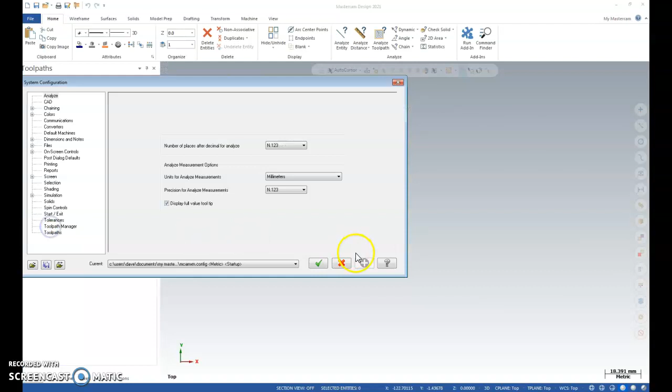All right, first things first. I'm gonna remind you that we're in metric right now. We don't want to be, so I'm gonna go to File and Configuration, slide down here, go to inches, and then change it to imperial. There I am. Perfect. And then I'm going to go load my file in.

So I'm going to open my file. I'm going to go to my computer. It's in this folder. Oh, look, it's not there. That's because I have to make sure I turn on AutoCAD files. And there it is. Open that up. There's my guy. It's got lots of different layers in it.

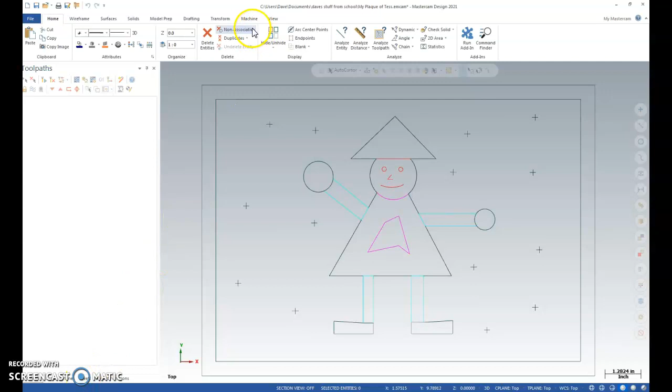First things first though, layers are down here. It's called levels in Mastercam. Going to go here to machine and load up the default machine. And open up my dialog box, change my tool settings. There we go. And select, drop down bar, go to library, slide down to the bottom, and there's wood. Checkbox.

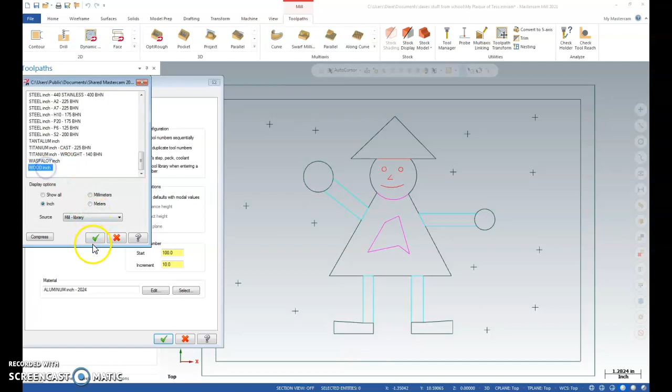I'm going to go to stock setup, going to display, do the corner, going to go 10 for the height. That's this way, Y, and 14. That's X, that's this way. And 1. Beautiful. All good. Checkbox. There's my red border around. I know I'm looking good.

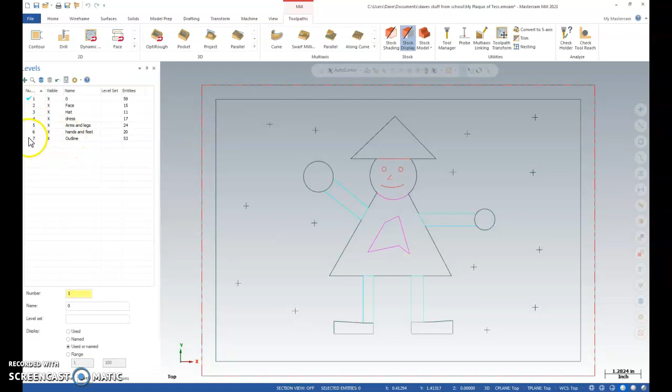Now what I want to do is turn off all the layers except for the one that is the outline. I'm going to start there, and you should always start there too. So here's my way to turn layers on and off. Level. I'm going to checkbox the actual layer I want to work on, which is the outline. So there's the checkbox, and then I'm going to turn all the other layers off. And look, I just end up with my layer guy.

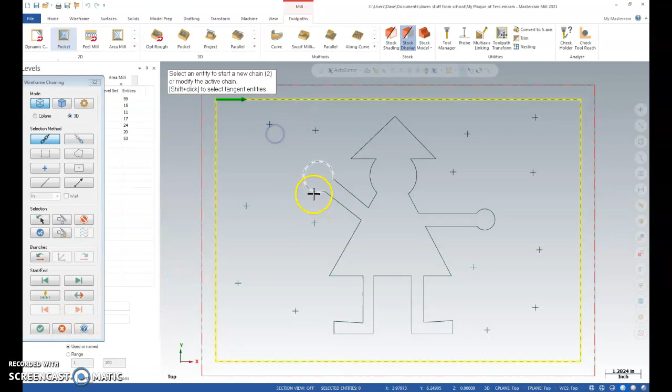And I'm going to do the outline, so that's going to be a pocket. So I'm going to scoop out all the wood between here and here. So there I go, and I'm going to select the border and the object. That's going to remove all the material in here. I know I did a good job because I got 2 green arrows.

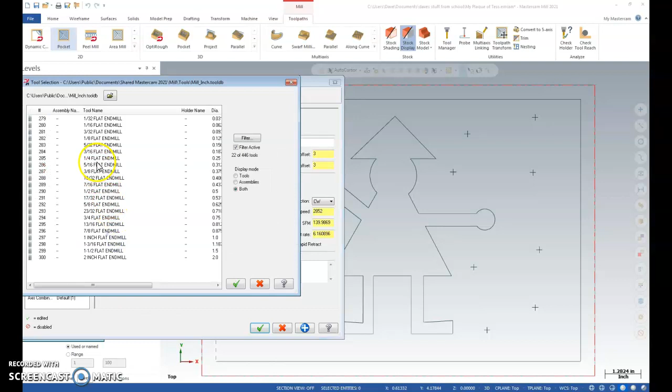So slide over here to checkbox and pick the tool. I got to select it from the library. So tool number 1 is 1/2 inch. Checkbox. Select tool. Tool number 2 is 1/4 inch. Checkbox, and these are end mills, remember. 1/16. Checkbox, and select library. Number 4 is 1/8. Beautiful. Checkbox. All right, I'm going to select that guy.

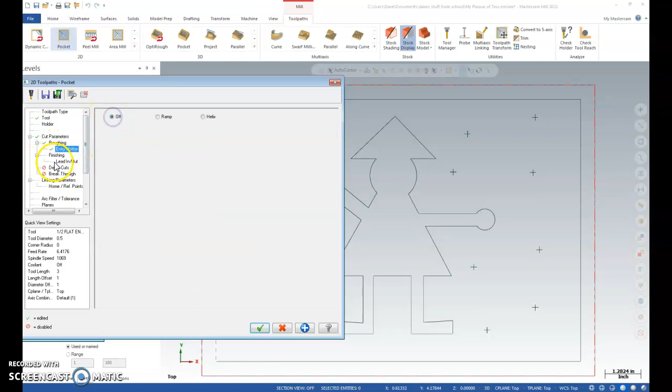I'm going to go to cut parameters. Remember, I have to get rid of this, so that's 0, 0. Roughing, I'm going to make it a zigzag pattern. Entry motion, I turn off. Finishing, I leave on. Lead in, lead out, I turn off. I put in my first cut depth, which is minus 0.25.

And checkbox. Now I could verify this and make sure it all works, but last time I did that on my computer, it crashed. So I'm probably going to wait till near the end, because really the lesson's just about turning layers on and off. But I would check virtually every single time.

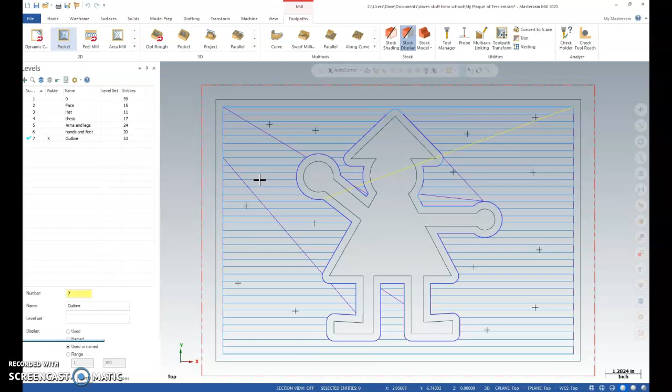So I'm going to come back here to Toolpath, and I would normally go Select All, Regen Path, and then I would go over here to Verify. But I'm not going to do it right now because I'm a little nervous since it's already crashed on me once today on my old computer.

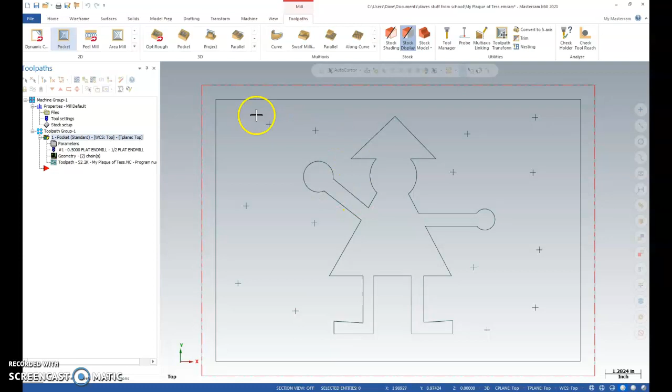The next thing I'm going to do is get rid of all these lines, right? So I'm going to turn them off. And I want to go around this and make it nicer. So this is going to sound familiar. So I'm going to go to Contour.

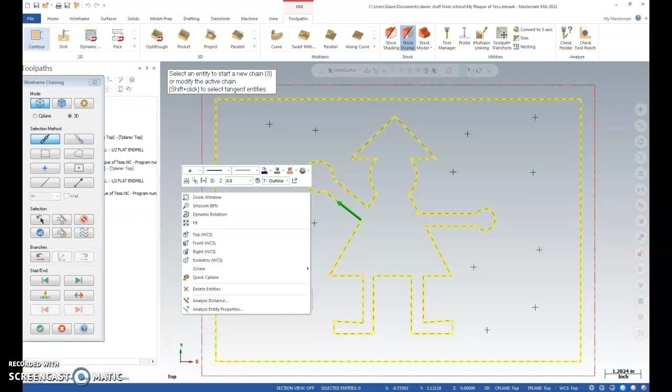And I'm going to select the inside of the border, counterclockwise green arrow. I'm going to select the outside of the outline, and that is going to be the tool on the outside. And then I'm going to go to checkbox.

And then I'm going to slide over here to tool. I'm going to go 1/4 inch. I'm going to remember to make the speed 59. I hope I changed the other one. I think I didn't, so I may have to go and modify that, 10 and 60. 59 because it's tool 2. Tool 1 is going to go at 60, and they all have different speeds.

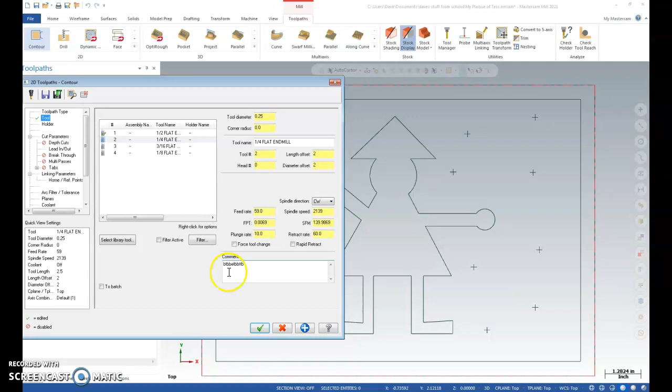Lead in, lead out, we turn off for our work in wood and acrylic. Linking parameters is where I'm going to put the depth in. If you recall, the pocket was down 1/4 inch, so this one's going to be down 0.25. All of this would come from my sketches and the work I had done earlier.

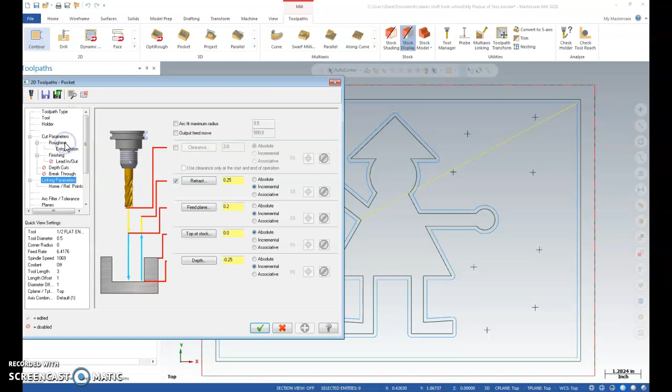Checkbox. Now, remember, I messed up here - I didn't get the speed right on this one, so I'm going to select that, go back to Tool, and fix the speed up. Tool 1 runs at 60, those are inches per minute, and then 10, and then 60.

Great, blah blah blah about what I did there. Checkbox. All right, I'm looking good now. So I have that, and I have around here so I get a little more detail. But I could go for a little bit more detail, so if I select this one only, I can right-click, copy it, then right-click and paste. So this is the exact same toolpath as this one.

Now I want to change this to half the diameter again, which is an 8th-inch tool. I'm going to go to Parameters, change that tool to 1/8 inch, right here. The 3/16 is really only used to pocket small spaces that the 1/4 inch or 1/2 inch won't fit in - it's never used for contouring. So anyway, 1/8 inch, you can count down, that would be 57, and 10 and 60 stay the same, and blah blah blah because it copied all the same stuff.

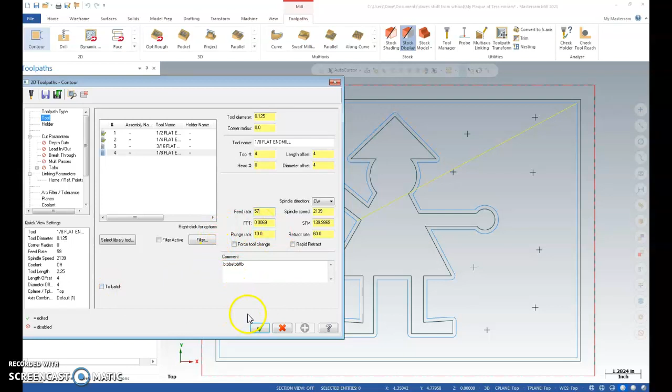And I would go, same depth will be here, see, -1/4, so checkbox. And now we're all set. Do you notice that the red X is there? That's because I changed something, the tool, so I have to select all and regenerate the path. If you see red X's in here, you always need to select all and regen the path.

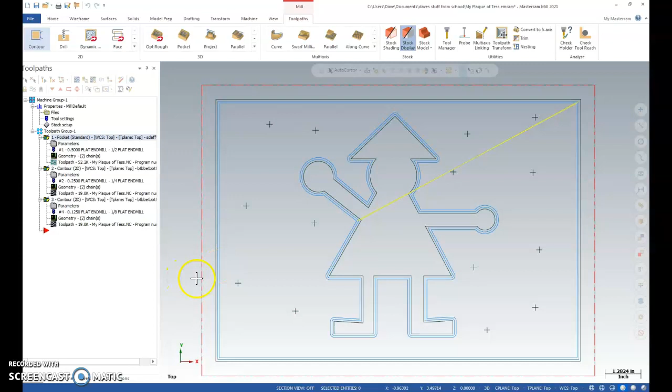Okay, I'm looking good, I have the outline, it's completed, I don't need to do any more, so I'm finished with that. I'm going to turn that layer off and work on a different layer. I'm going to get rid of the tool paths first by hitting the wavy thing, so then it puts them all on, turns them all off.

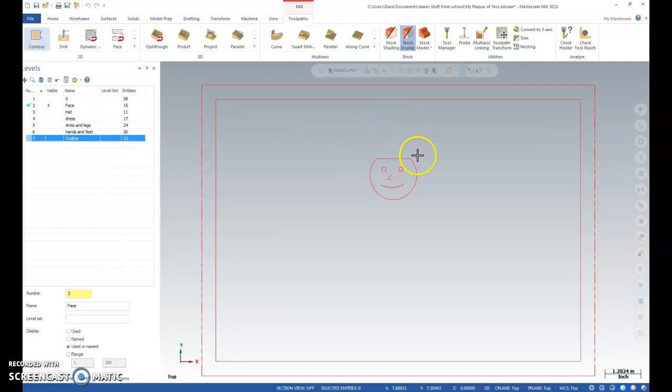Okay, I'm going to come back to levels and work with the face, checking that and turning all the others off. So there's the face, I am only going to pocket the face. This is how we do things - we work our way from top down. The hat I'm just going to leave, and it will eventually be there on the surface, as will the border, and then I'm going down 0.05, just like my sketch for the face.

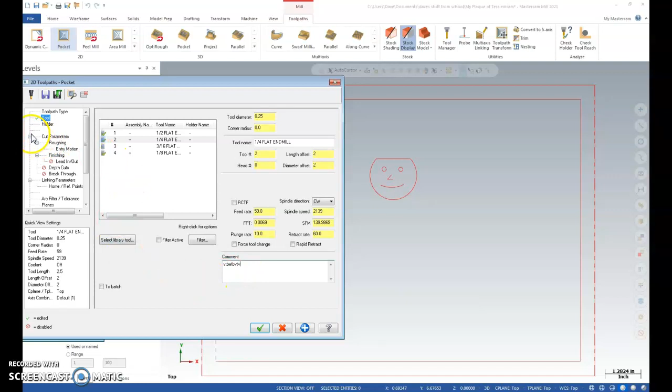So here I go, I'm going to do a pocket, and click it - doesn't matter what way the arrow goes in a pocket. Checkbox, tool, use 1/4 inch, 59, and 10, and 60. Blah blah blah blah blah about the depth and the tool and everything. All of this will stay the same, and then I just have to put in here the new depth, and I am only going down 0.05 according to my sketch.

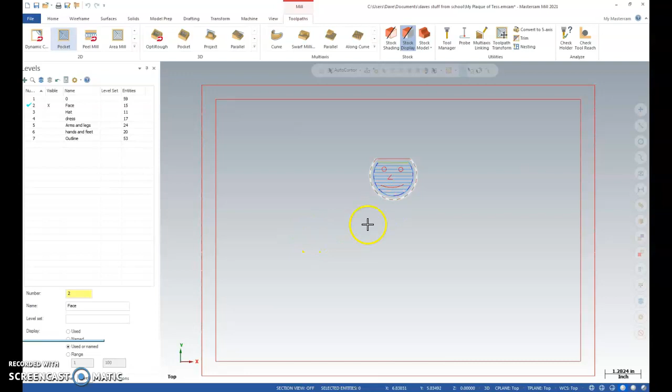Checkbox. Now I want to do the engraving that's in there too, so I'm going to do that probably right now since it's already there. So this toolpath is there, I'm going to go back to my toolpaths - so there's my toolpaths, that is the pocket, that is the face. I am going to now do the engraving in here.

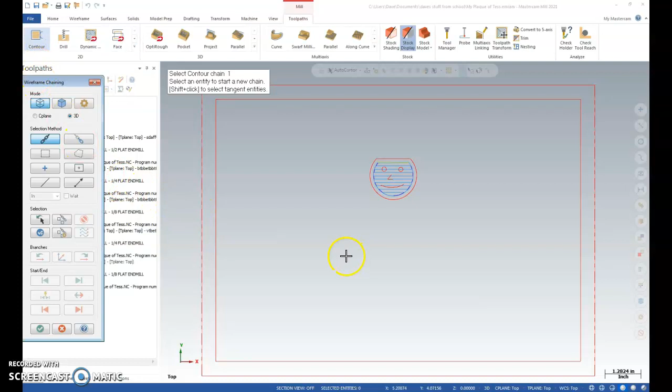So in order to do the engraving, I'm going to go here to Contour, and I'm going to pick this bounding box. I'm going to roll in here, get closer, and make a bounding box around what I want to engrave.

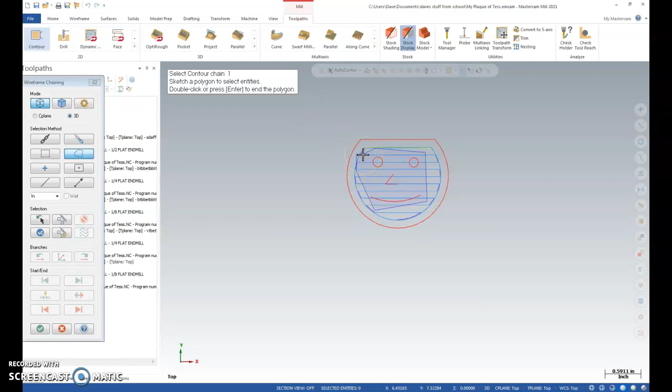If you look up there on the left, it talks about how to get out of that, so I'll just hit Enter. It's going to ask me where I want to start my engraving. I'll start right there, and checkbox. The arrows mean nothing for engraving.

The tool, I haven't loaded it yet, so I'm going to select it from the library. All the engraving tools are already up because I put them in earlier, so I'll show you where they are. Filter - there's engraving tools, there's end mills. If I didn't want any tools on, I just say none, and then I could just select engraving or just end mills.

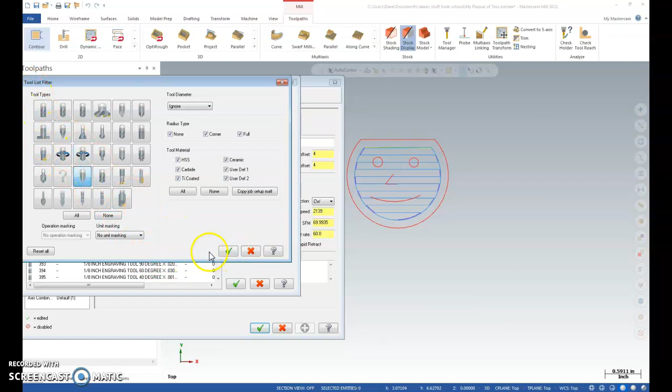So checkbox, and we're going down to tool 425. That's the same tool as we use in our machine. It's got a really sharp tip and it's 60 degree. Checkbox.

And the feed rate for this guy is 56. It's our 5th tool. You plunge at 10, nice and slow, always, and 60 for retract. And I can write in here, blah blah blah, engraving the face with the engraving tool. So that is done other than the depth.

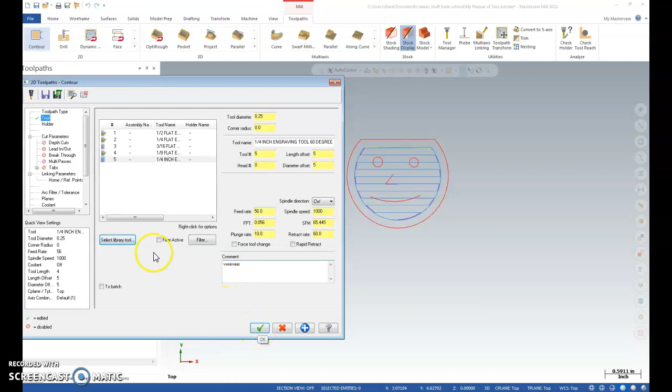As I told you before, this surface is down 0.05, so I have to go minus 0.08, which is 0.03 deeper than the surface that you want to mill on. So, checkbox.

Oh, a syntax error. All right, well, I guess we're done. You get the picture, from here on in all you do is you just keep going. Well, maybe I'll just try clicking that. Maybe I had - oh, I do, I have an extra dot here. Whew, I got worried that I did something silly or got kicked out. 0.08, okay, I had an extra decimal.

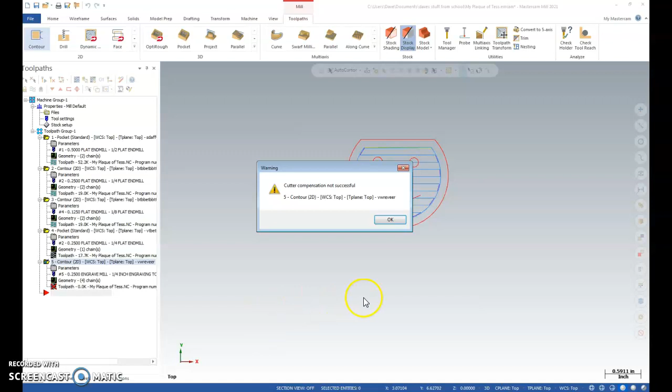So, all right, oh now it's not successful. Now that's because you say okay, it's going to say that for all of them. You're going to go here to parameters because I forgot to check something. I should have gone to cut parameters because it was engraving and turned the compensation off. So checkbox, and look, big fat red X because I changed something. So select all, regen path, and it's happy now.

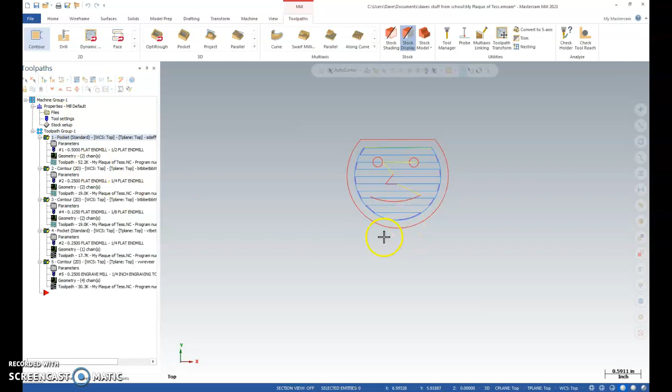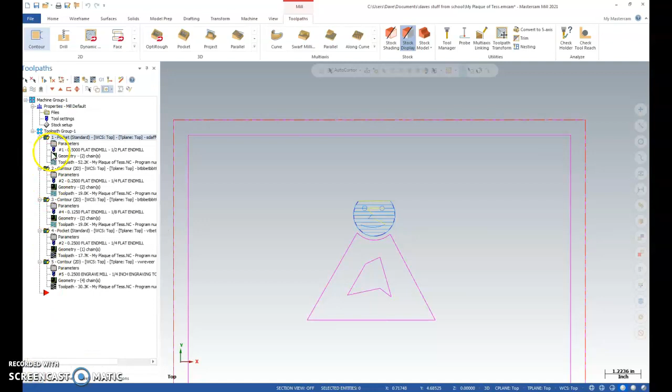All right, fantastic. Let's do one more layer before I run out of time - I'm only going to go to 15 minutes. So I'm going to go to levels, and this time I'm going to do the dress, so I'm going to make that the layer of choice, turn that guy off. Now I'm going to go back to toolpaths, hit the wavy line to get rid of the old ones. Boom, they're all gone. I'm going to pocket in here and I'm going to engrave that.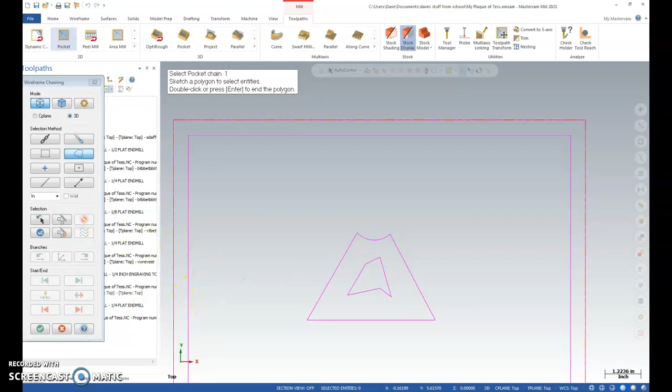So here I go, pocket, and just doing the inside of this guy. Oh sorry, obviously I have to pick the chain. Sometimes you have to do that, I don't really know why.

Checkbox, and then the tool - I'd say 1/4 inch is fine. I might clean it up with the 1/8 inch after, but I'm not going to do that for right now. So that's 59 because the 1/4 inch, and 10, and 60.

Excellent, and again blah blah blah. And then I would come over here and change that depth to minus 0.1, because again that was according to my sketch. Remember, I had all 5 of these layers, and I'm going down 0.05 because 5 went into 0.25, 0.05 times. So checkbox.

Great, that was done correctly, and now I'm going to engrave that. So here I go, contour, I'm going to do that box around it again. Remember, you just hit enter to end it. So it asks me where to begin, click, and then I'm going to go checkbox.

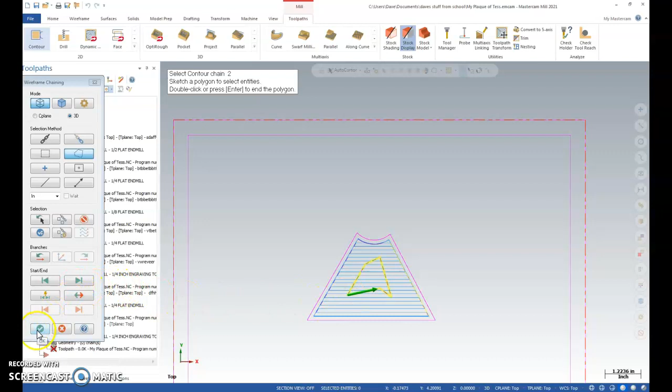And then this time I'm going to go to the tool, pick the engraving tool still again. The speeds are good, going to go to cut parameters, yep it's still off like I want for engraving. And then remember, that layer was at 0.1 down, so I'm going to go 0.13, 0.03 deeper than the layer I was on. Checkbox.

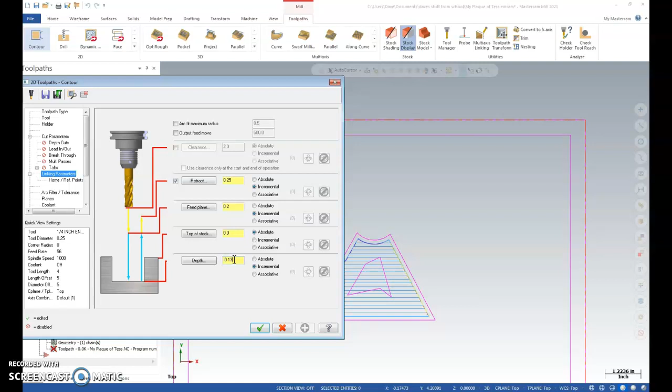And yeah, great, all right, so I don't think I'll be able to do any more layers, but I think you get the picture. I'm going to maybe make them all - well, I could try one more. No, I'm going to run out of time. So let's go back to toolpaths, and we'll do select all and regen them all.

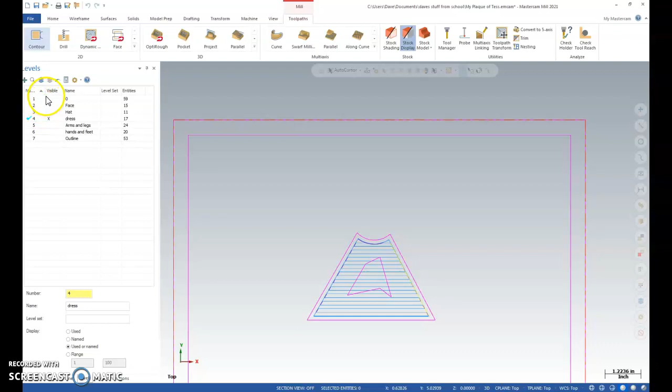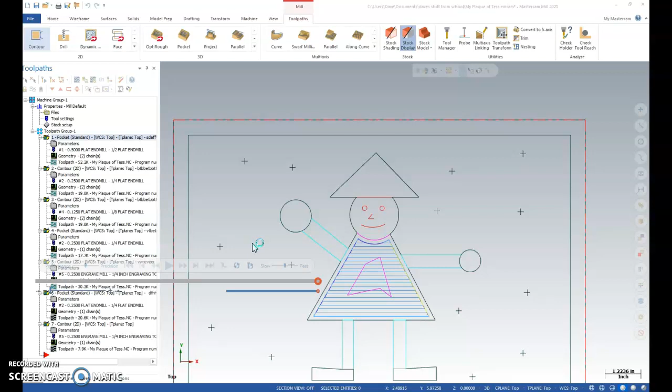And then we'll actually try, I'll turn the layers on, turn them all back on. And we'll see what we get so far. So here we go. Select all, regen path, and I'll try and see what we have done so far. If it kicks it out, well, so what? All right, maybe not, maybe we'll get her. Oh gosh, it's close, and we're kicked out. All right.